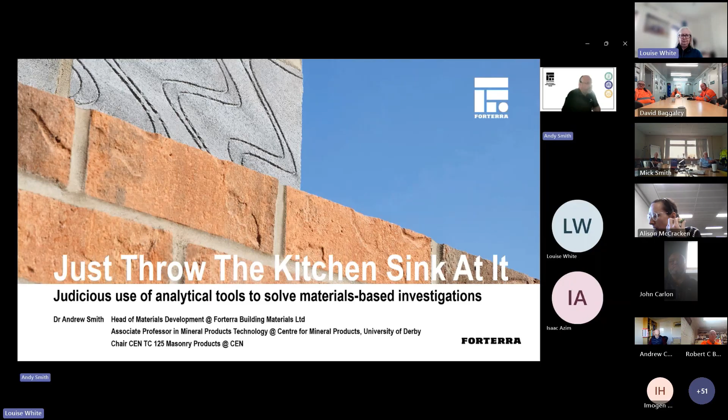Hi, and thank you for joining me for this presentation on Just Throw the Kitchen Sink at It. Most of you all know me. My name is Dr. Andrew Smith, Head of Materials at Forterra Building Materials. Some of you will also be aware that I'm also one of the main deliverers of the programs at the University of Derby on the clay side of matters, and also that I chair the European Standards Technical Committee for masonry products. So, as you can imagine, analytical techniques and how to solve materials-based problems is very close to my heart.

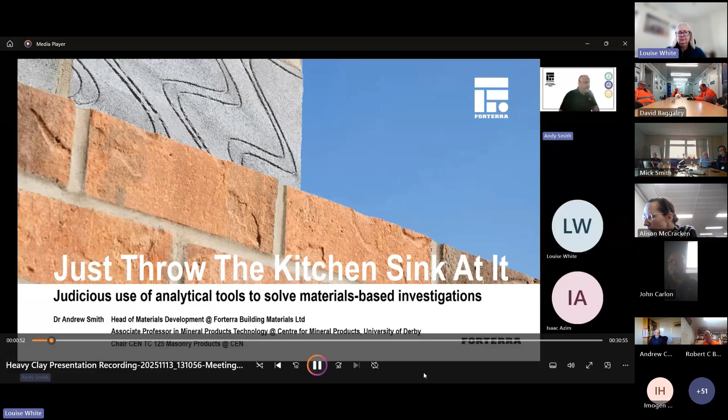So let's start off and try to put things into context. There is great importance in understanding what analytical techniques are available and how we can use them. But the first thing that sprung to my mind was: you can have all the gear but no idea. What I mean there is that you can have all of the equipment at your fingertips, which these days we predominantly do, but if you don't have the idea of how to use them, then you're defeating the object. You may be making mistakes, you may be making some misinterpretations that can lead you down paths that you don't necessarily wish to go.

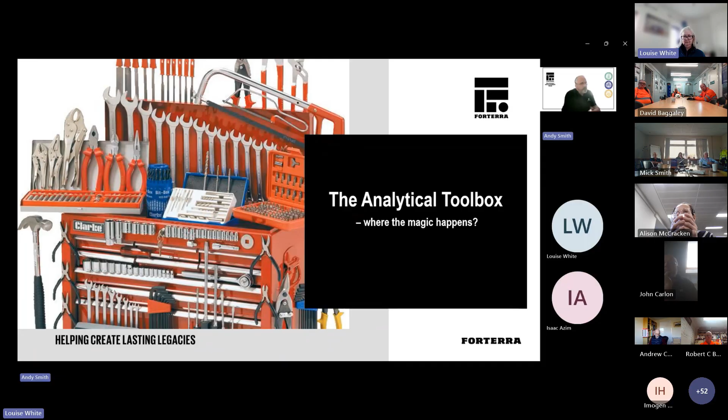So the analytical toolbox - this is where the magic really happens. Well, it really only happens if we use the right tools for the right job. So a lot of this presentation today is really around understanding what you're trying to achieve in the first place. A lot of the hard work is done before you actually go out and use the analytical techniques, by understanding and scoping what I would say is the question. So it's all about the question - what information are you trying to acquire? Or put another way, what are you trying to understand from the questions that you're asking? What is the problem you're trying to solve?

So really, before we throw time, resource, and money into solving a material-based problem, we need to understand the fundamentals of what that problem is and put it into a context that allows us to pick the right tool for the right job. So I can break that down into: what is it, where is it, when is it, how is it, and why?

So the what aspect is very much around the scope - what is the type of information that you're requiring from an analytical investigation? In the context of heavy clay, a lot of the time that relates to the materials we're using - predominantly the materials in the ground that we're winning ourselves, or those materials we're bringing in from external third parties. The where could be, is it a specific material? Is it a particular quarry? Is it a particular seam within a quarry? Or is it more generic? Or is it also specific to a stage in the manufacturing process?

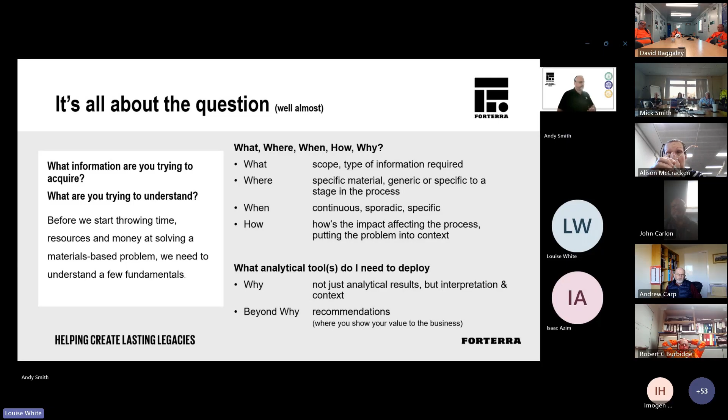Or it could be something more specific and closer to home, in terms of the stockpiles that we've built. We could be taking material out during the preparation stage, the forming stage, the drying stage, or the firing stage of the actual brick making, roof tile making, clay pipe, clay paver type process.

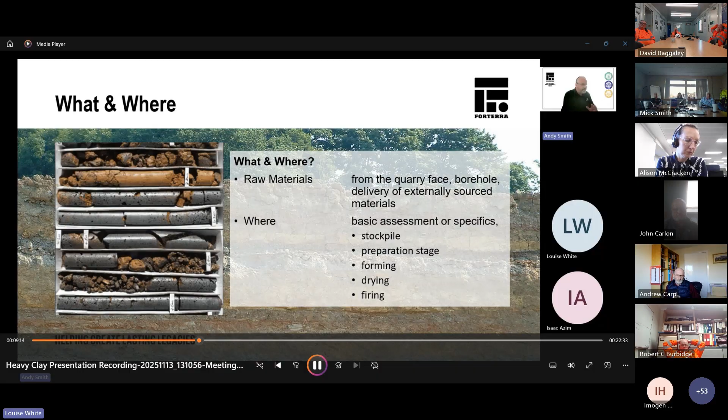So there's an aspect here of, again, depending upon where you are in the process—if you're right at the very front end, before the material has actually ever been won, or you're within the process and something is not quite right and you're being asked to investigate it—then there are different tools that you would apply or deploy in order to give you the answers that you're looking for.

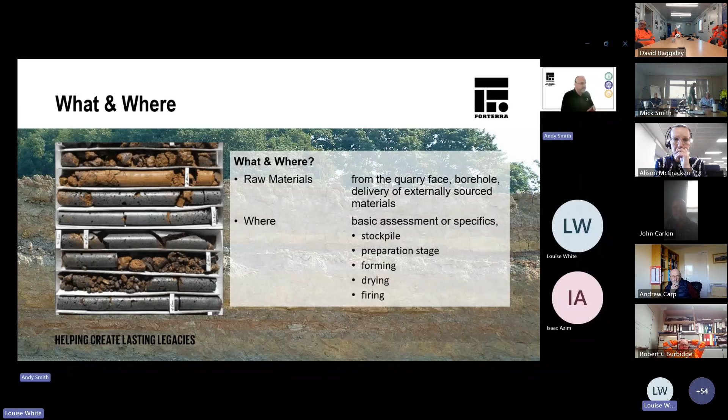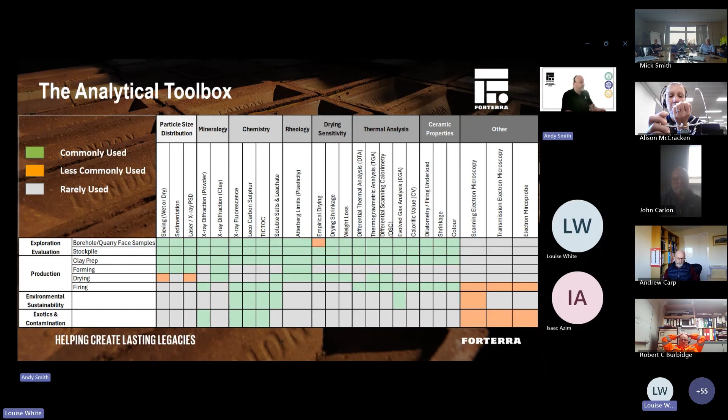So let's have a look at understanding clay-based materials. Because we're talking about heavy clays here, and the heavy clay side of the construction materials sector, all of these are pretty much applicable to any of the heavy clay product types. Obviously I'll be focusing on bricks, but it's applicable to block, roof tile, and pipe manufacturing as well.

So size matters—in the context of particle size distribution, size really does matter, because we think of our deposits as being clay deposits, we talk about them being clay deposits. But as those of you who've done this type of analysis before will know, the clay mineral component can be as little as 10-15% of what the bulk raw material actually is in terms of what we make our clay bricks, roof tiles, and clay blocks out of. So understanding the fundamentals of how much clay is actually in our clay deposit is really important.

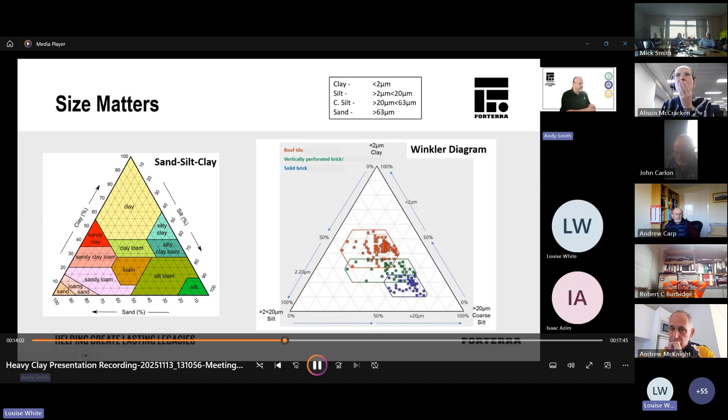Fundamentally, it breaks down to the sedimentary deposits that we're looking at—the raw materials can be broken down into 3 or 4 principal size fractions: the clay fraction, the silt, the coarse silt, and the sand fraction. The bit we're really interested in is the clay fraction and also the silt fraction. The coarse silts and sands are basically the bulking agents that go in there and can change some of the properties of the raw material as it goes through our manufacturing process.

But fundamentally, the first thing we need to understand is how much clay we've got present, because that leads on to other aspects that give us an indication of how the clay is going to perform. So the more clay we have, that will affect the plasticity properties.

That will have an influence on the shaping, the forming process, as well as the drying process. It will also influence the firing process, because the more clay mineral we have, the more ceramic glass we're likely to produce, which bonds the brick together and gives it its physical properties at the end of firing. So by understanding how much clay mineral is present, we can start to answer questions about how the final product will perform.

This can be done in a number of ways, but you can see here what we call ternary plots. In triangular form, each point of the triangle represents sand, silt or clay fractions, or in the case of the Winkler diagram, clay, silt and coarse silt being plotted.

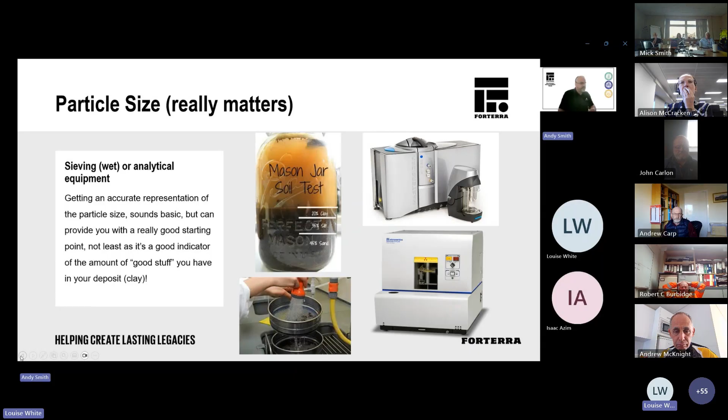Or we can use analytical techniques, such as the Malvern Mastersizer, which is a laser sizing process, or a Sedigraph, which uses a slightly different technique. Essentially we can use the same approach to understand particle size.

We can get data presented in a number of different ways. I've put two graphs here showing exactly the same data, but presented differently - one is a standard grading curve, the other a volume density percentage. Depending on what questions you're asking or what answers you require, you can use either technique to present the data in the way that's best or easiest to interpret.

If we take the data from the upper graph, our standard grading curve, we can take that information and ask: what is our clay fraction? What is our silt fraction? What is our coarse silt fraction? And where does it plot on our clay, silt, sand graph?

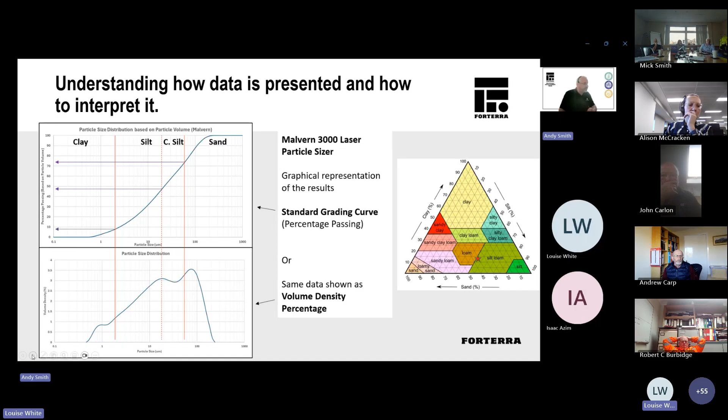The material I was looking at here plots in this silt loam area, which is not untypical of the types of material we generally use for making bricks.

Plasticity - the clay's influence on how the clay body performs - is also important. Clay's superpower number one is its plasticity. We all recognize things like non-sticky material that doesn't stick to your fingers as you play with it, through to being very sticky or very plastic. But occasionally it can go a bit too far, and we don't really want to go there.

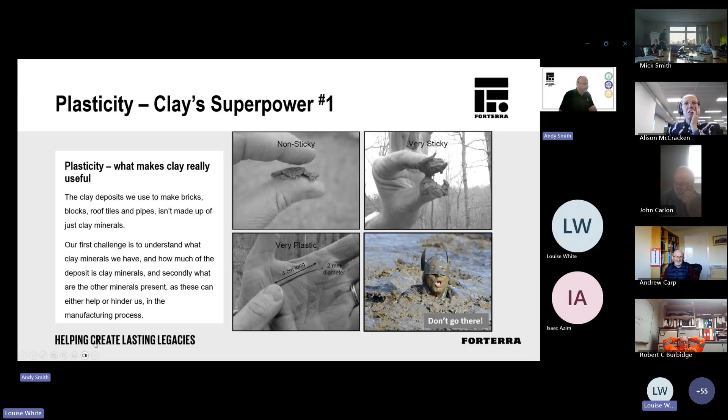So how can we look at this plasticity process? We can use something like the Casagrande method, which you see here on the left. This is a method for determining the liquid limit, so the point at which our clay body performs more like a liquid than a solid.

And then the second aspect of this is we can look at the plastic limit. There's a Casagrande method where we can use the equipment there with the brass shell. It's an old technique developed for assessing soils and geotechnical information, but it's really useful in understanding where the thresholds are for how much moisture you need to make a plastic body - what the upper limit is and what the lower limit is.

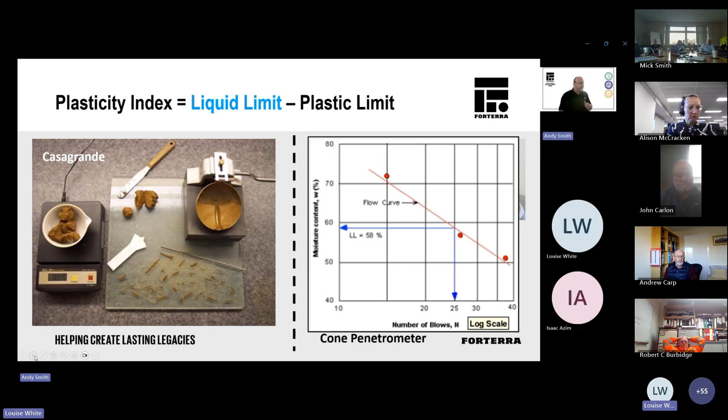The plastic limit at the opposite end is how little moisture you can get away with putting into the body. This is really the area we need to be working towards, that threshold. We need a plastic body so we can mold it and shape it, but we don't want too much water in there that it takes a long time to dry the products during drying. So we need to form the brick shape, the roof tile shape, extrude the clay block, but we don't want it so wet that it takes a long time and a lot of energy to actually get that water out of the body.

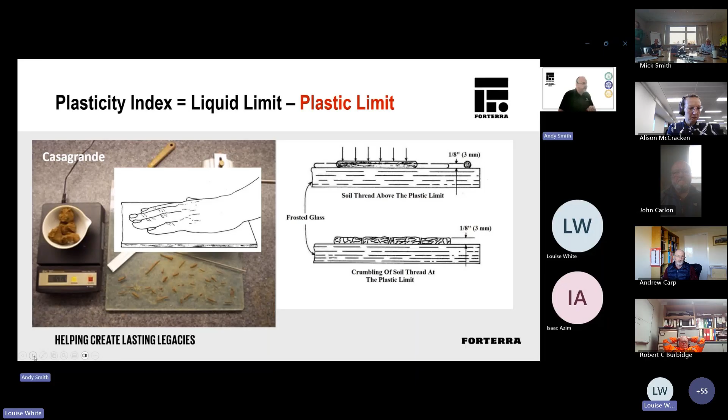So using this plasticity index, we can get some predictive understanding of how our material is going to perform. It's key to understanding the extrusion, the soft mud, the drying shrinkage, and drying sensitivities. For each clay type, we can identify what the optimum is for the particular processes we're trying to use - so if you're using it for soft mud or for extrusion, they will have a different plasticity index value that you're trying to achieve. It's quite a powerful tool for understanding how your clay is going to perform during the manufacturing process itself.

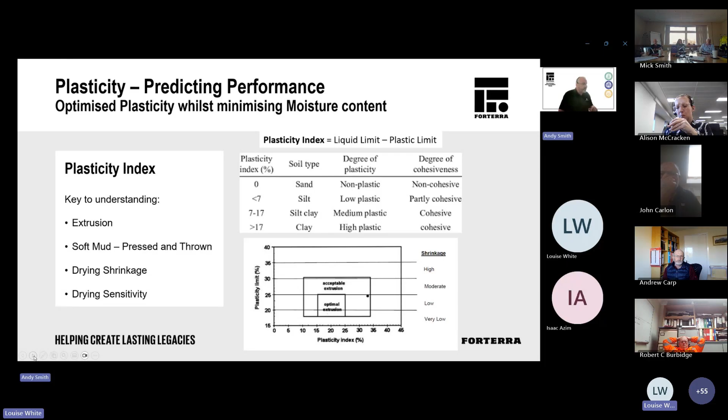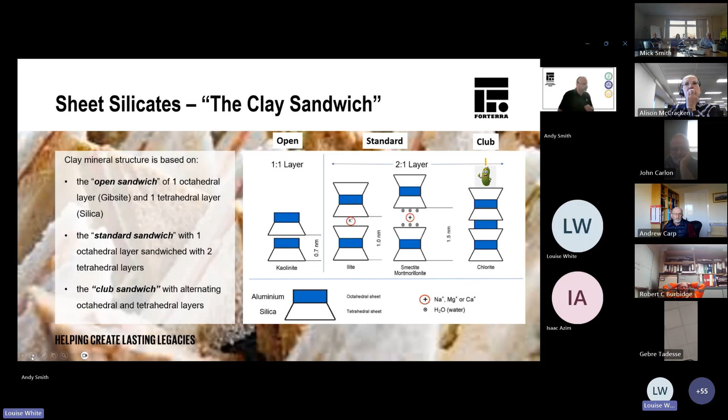One way we can look at the clay mineral specifically is we can extract the clay mineral from our clay body and look at how it reacts. One of the important things is using a technique known as X-ray diffraction, particularly the clay-oriented mount process. Basically, we take the clay off as a slurry, pipette it onto a glass slide, dry that glass slide, and then run it through an X-ray diffraction machine.

This allows us to differentiate - clay minerals have very, very similar structures, so one of the important things is for us to be able to differentiate between them. We can use an air dried sample, and we can treat the sample with ethylene glycol as well, which expands the spacing between layers, working on swelling clays such as the montmorillonites. Or we could heat treat them, such as the kaolinite, where if you heat kaolin above 550 degrees, the structure collapses, so it disappears off the trace.

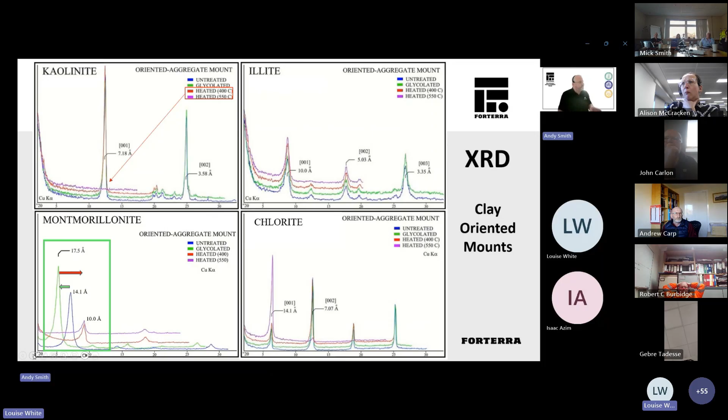On the montmorillonite side, if we use ethylene glycol to soak into the clay, it will expand the swelling layers in between the clay structure, and therefore we can see that with the X-ray diffractometer. Again, if we then heat it, they will collapse back to the illitic structure at 10 angstroms. There are lots of these different techniques, and a lot of interpretation that goes with it, but they're powerful tools to understand and predict how our materials are going to perform.

And this is just one way, one material that we've looked at, basically air dried and glycolated, and we can see that there is a montmorillonite or smectite type of clay mineral present that is going to influence the drying shrinkage, the plasticity values for our material as we use it.

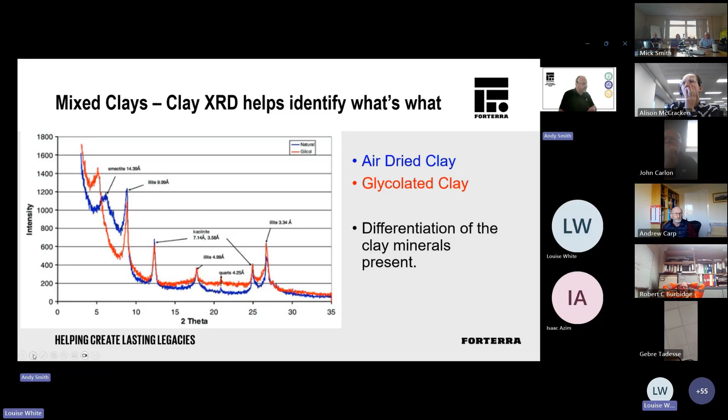The other thing we can use is what happens during the firing process, understanding what happens to our clay body as it goes through firing. Essentially what I refer to this as, and some of you have heard me talk about this before, is the time temperature transformations.

So the ones for us that are really important are what the clay minerals are doing, and what some of the other materials are doing, such as the calcite, the gypsum, the pyrite, because they're the ones that will be giving off gases. The illite, the chlorite, the kaolinite, the montmorillonite, they will be converting into the ceramic glue that sticks our bricks together.

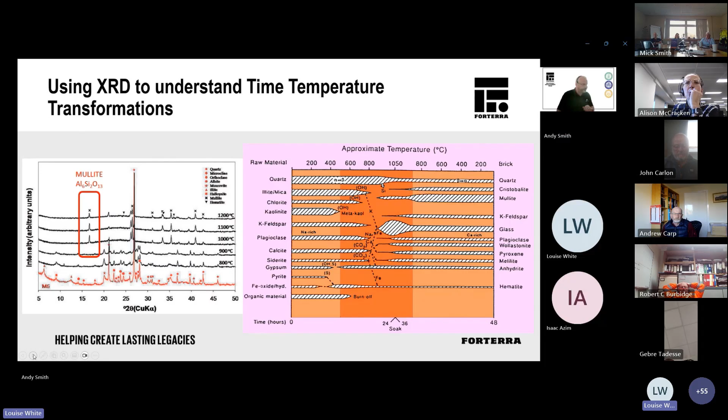Next, obviously a lot of us are very much dependent upon what the color of our product is, so therefore the iron content is important. Looking at the iron content gives us an indication of what color it will fire to.

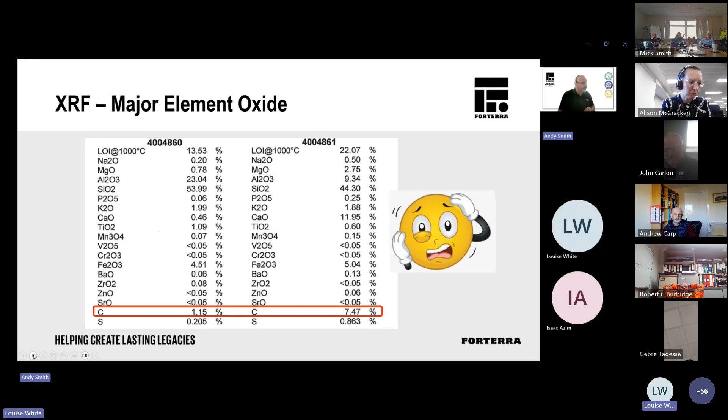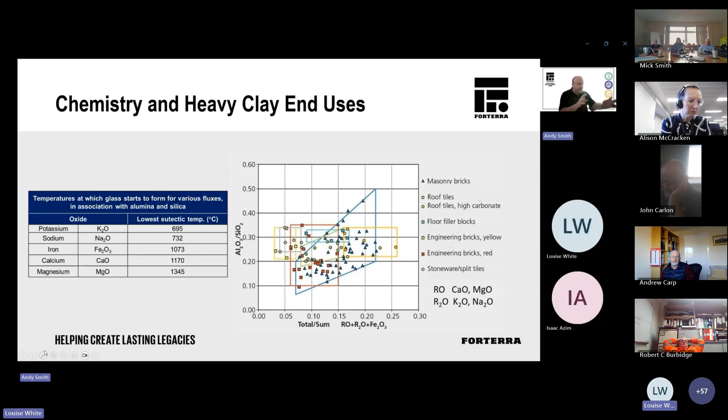We can also use it to look at the fluxes, so therefore what temperature things are likely to happen. If we have high potassium, high sodium levels, things are likely to happen at a lower temperature in terms of glass formation, the ceramic bond in the firing process, than if we've got calcium and magnesium dominant materials. And therefore we can plot those and use that information in a slightly different way to give us an indication of where our materials fit.

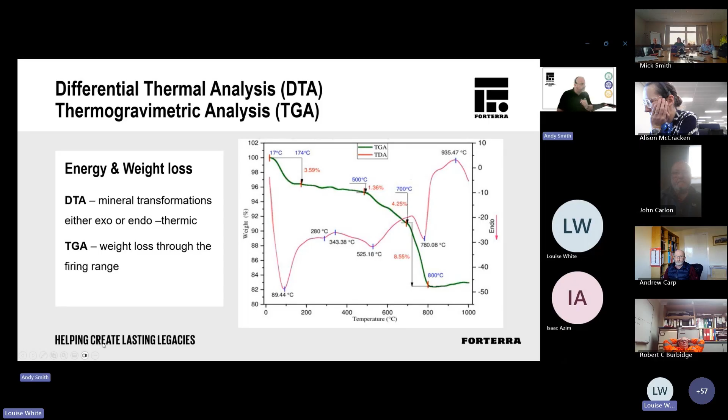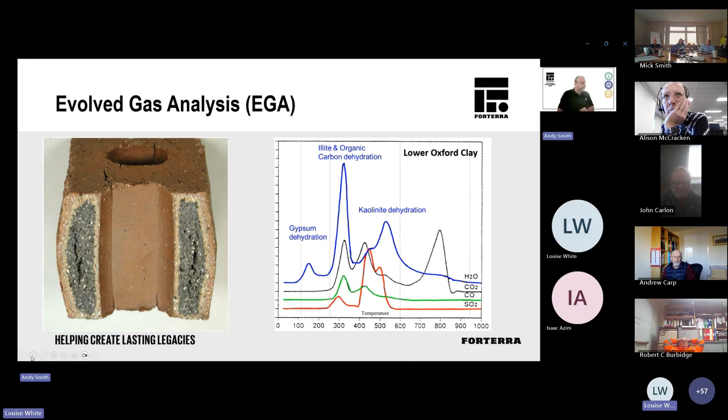So this tool is quite useful in understanding what gases are coming off at what temperatures, and therefore we can build that into our firing curves. So that's been a rapid run through the analytical techniques and approaches you can use - the judicious use of analytical tools is basically select the right tool for the right job.

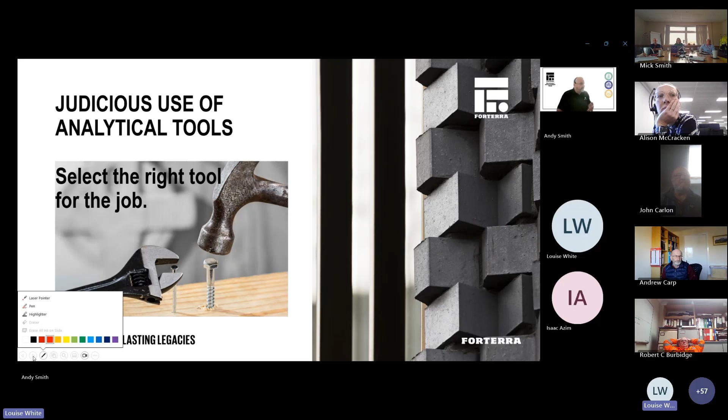So with that, I'd like to thank you. I hope you found that useful. It's been a bit of a skip through the process, but hopefully that will give you a few insights of what can be done and how you can take that information and put it into your manufacturing process. Thank you.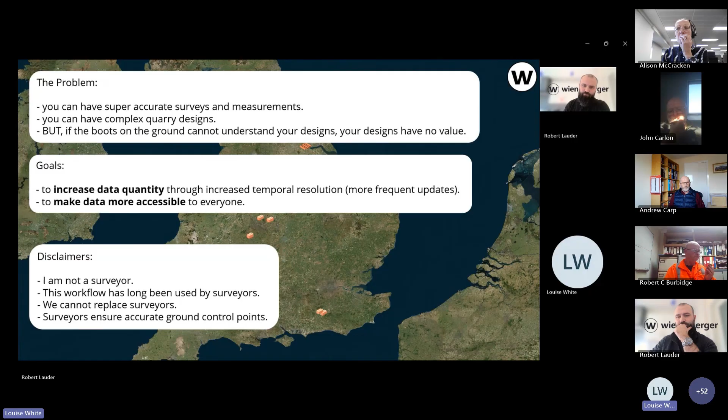So, stockpile building. I'm just going to look at an idealized timeline of a clay win at one of our sites. This is going to be traditionally, so before I started using drones, how it would usually go.

So you'd get your stock survey. This one was around March. At this point, you'll already have a rough timeline of when you're thinking of clay winning, but this will firm up the date for stockpile depletion and firm up that clay win start date.

So once you've got the survey back, you'll draw up initial ideas, discuss options with the site, things like material sources, your blends, any major targets. So if you're putting in any major ramps, establishing tips, big objectives for the clay win.

Later down the line, this will be, say, a month before your clay winning, you get this final stockpile survey just to confirm the volumes that you're going to need. This is when I would do a detailed design.

By this point, we already know what we're going to do. I'll just have a month then to get together all the designs, get them all ready to send over to the site.

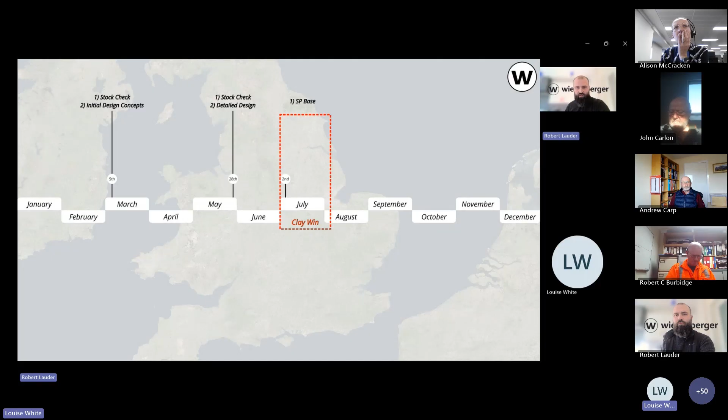This is clay win start. So you'll do your stockpile base prep, then you'll get it surveyed. All you guys know all of this, but just for anyone that doesn't, the design is pegged out by the contractors, surveyors, and the excavation and stockpile construction proceeds as per the design, which I produced at the end of May here.

We would get minimum input other than the contractors, surveyors during the course of the clay win. You'd get a full survey done at the end of the clay win to finalise your volumes, and this will be your only opportunity to check your excavations and stockpiles ourselves.

Usually by this point the contractor would have left site, so if you have problems, it's too late. They're going to have to wait till next year, or you're going to have to get them back in. So this was before I started using drones.

And then these are just your standard, say, stock checks throughout the rest of the year. This window is where our drone use comes in.

So this is where we get extra data throughout the clay win. We can check that we're in line with the design. We can make amendments if need be. We can sort of get a turnaround of, say, I could fly the drone, process it, come back with feedback the next day. So very fast turnaround.

This is also, while the excavations are fresh, we can capture the site's geology through multiple stages. So plenty of opportunities to trace any specific strata through the quarry, and you can get measurements of them as they're moving through. It just builds up a bigger three-dimensional 3D picture of the site.

This window here is where I'm going to be focusing in on. So stockpile extent and layer monitoring. I'm going to show a couple of slides now. They're going to have cross sections through the stockpiles. These cross sections were pulled from LSS, the point cloud into LSS, and then the cross sections.

So start the claywin. This is before there's been any movement by the contractors. I think it's important to capture the site before the stockpile prep, before you've done any base prep, just so that you make sure you're not adding material that's already on stock.

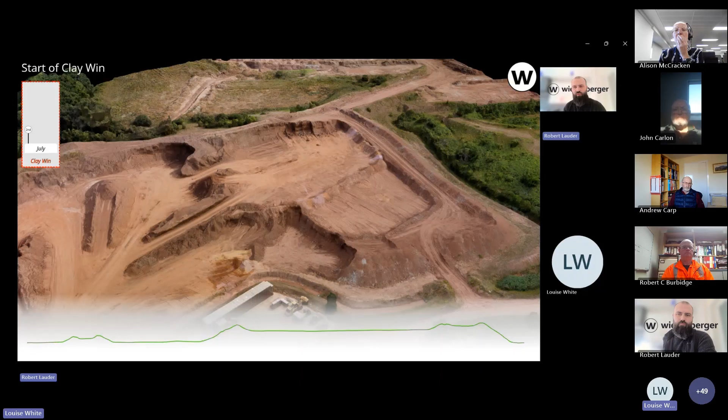In this example, we're going to show that the ramp will be pushed into layer one. It just gives you more control of what volume in the stockpile is what, and like I said, avoids double counting any stock.

So this is the target stockpile, pulled straight from LSS. This is the stockpile we need to build to give us the volumes that the factory needs. You can see on the bottom the cross section. Green is the base, and red is a cross section through the target stockpile.

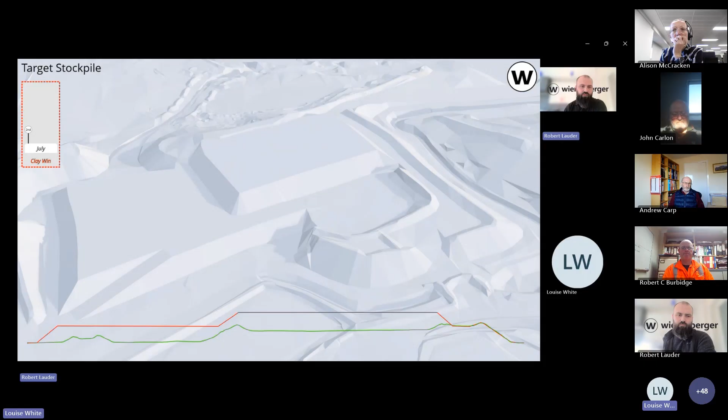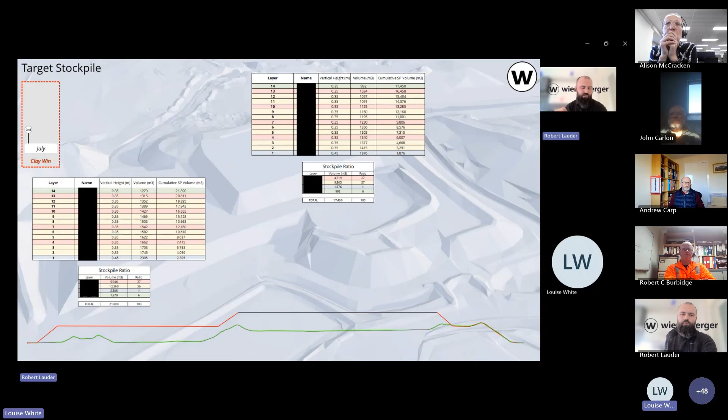Just standard layer plans. I put this to show that when I visit sites, they'll tell me what layer they're on. I'll refer to the layer plan and figure out how high they're meant to be, and we can check if they're building too fast or too slow, and give any feedback on how the layers are coming.

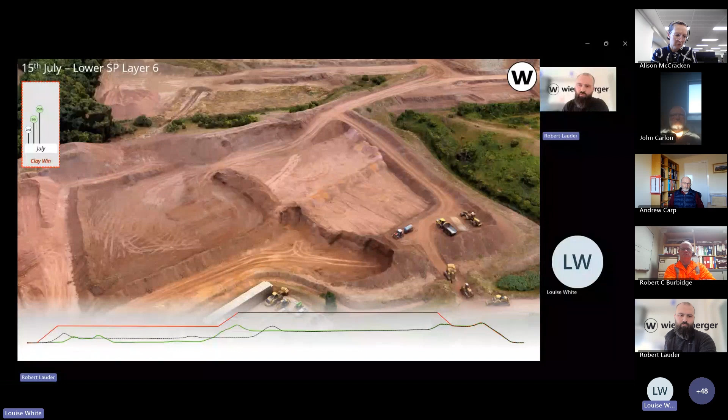Second week in, they were on layer 6 at this time. You can see the stockpile coming up slowly. This was the lower stockpile, layer 6 of 14. And again, it's an opportunity to give feedback to the contractor.

Third week in, layer 12 of 14 of the lower stockpile. You can see we're almost there for the target height.

Okay, so week 4, lower stockpile completed with edge protection. We're now building up the piggyback stockpile. We're on layer 6, building layer 6 there.

And this is a post-clay win survey, so you can see where we are. You can see where we've had to pull the stockpile back down here to allow access, and put your stockpile back there to give us that extra volume. So the volume that was in the designed stockpile that we needed was 39,000. We've got just under 42,000.

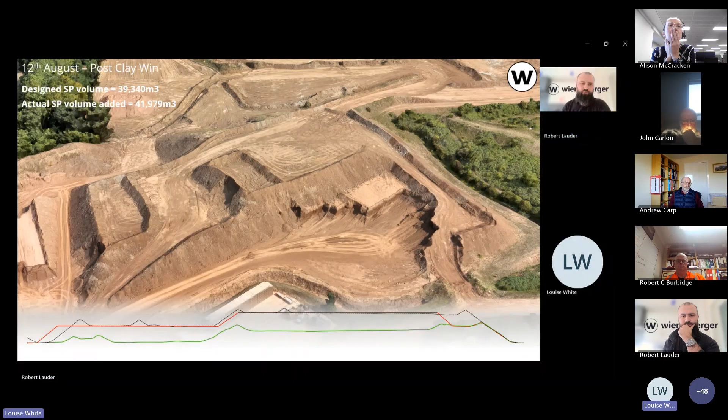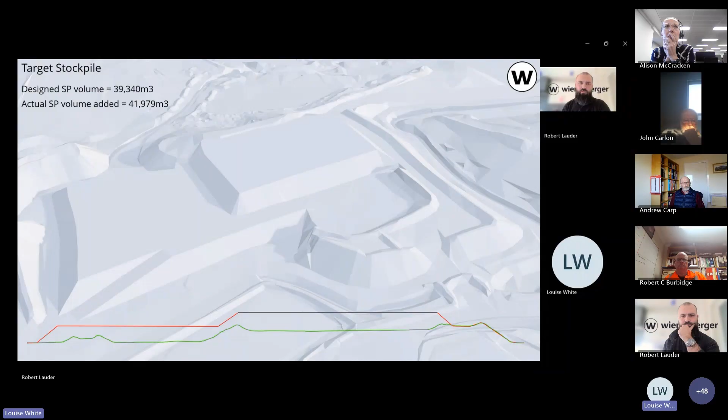Again, that's the target stockpile. I'll just flick back and forth so you can see. It's just a short video, an animation, just to show the changes over time. This is using the 3D meshes that we get from processing the drone imagery.

So quick before and after there. And this was in October, so you can just continue to get updates at whatever frequency you want.

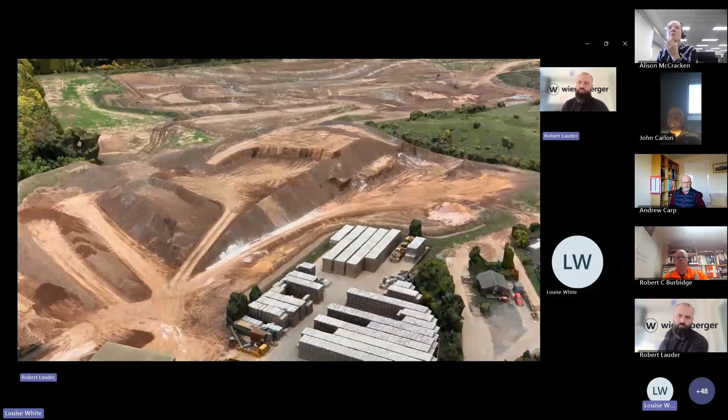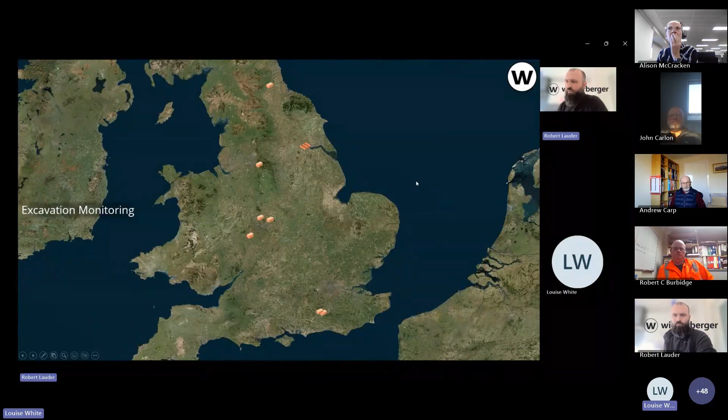And it's going to be about the same for excavation monitoring, same principle. It's going to show you an example of a ramp that we put in. So this is a new quarry ramp, which is going to be in for the remainder of the life of the quarry, so it's quite important to get right.

So this is quite a way into the clay win when there's not much change, because the digging was happening in another area of the quarry. They came to this towards the end. You can see this is third week, back to second week, third week, 4th week. See that ramp coming down.

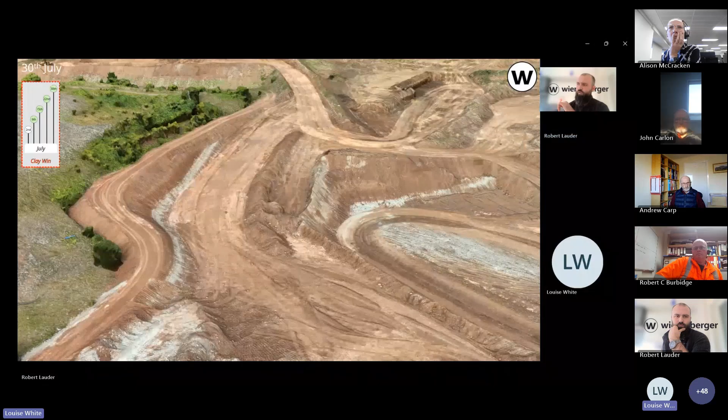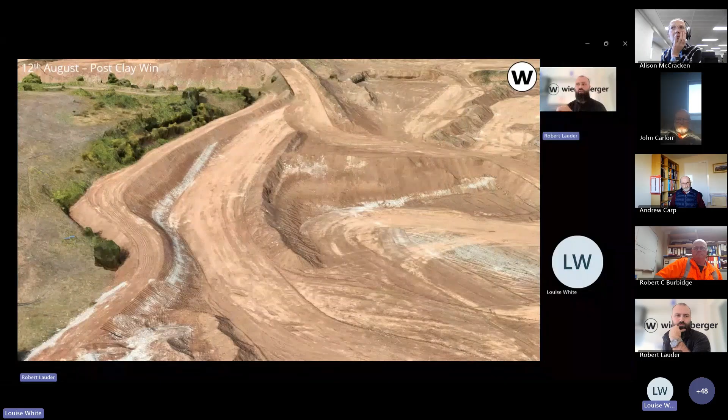This is the final post-clay win survey. Just do some comparisons with the design. So that's the actual survey. Here is the LSS design. And you can monitor that all the way through, just like we did with the stockpiles.

So, presenting data - this is another one for just data accessibility, anyone being able to view the data.

There's plenty of mobile mapping apps where you can export the imagery and export your designs, say your CAD designs or GIS, however you export them. You can load them straight to a mobile mapping app and send that to the quarry managers, and they can walk along it just like they're walking on Google Maps. Anything you want to draw on CAD or GIS, you can export so they can walk over any feature that you draw.

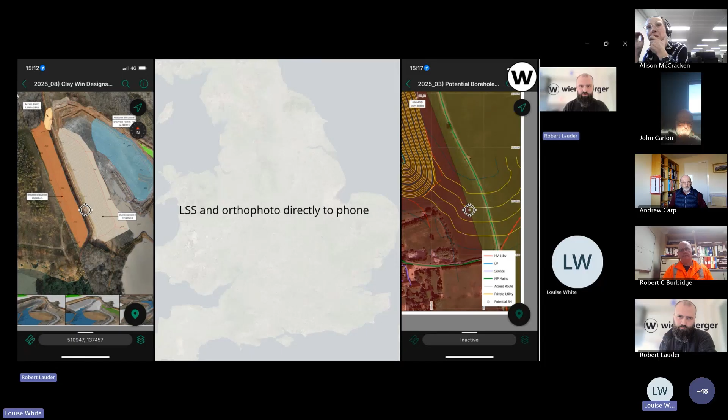This is the platform that we use for viewing the 3D models, and this is just to show that you don't need any software for this - I can share this as just a web link. You can see above and below. These are some of the comparisons - you pull this slider left to right, and you can do exactly what I showed you beforehand, but you can do that on a mobile phone. You can send this to anyone.

Some more examples of the ramp. Again, the ramp from another angle.

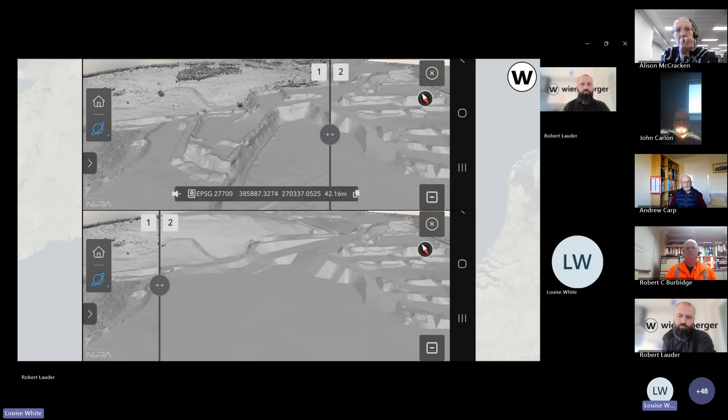So this is the final section here - it's about keeping a record of our sites. As you know, because the faces in clay quarries weather so quickly and grow vegetation pretty quick relative to hard rock, and a lot of them are landfilled, it's quite a small window for us to document the geology in these clay quarries.

When you're getting your surveys by drone, they'll capture the whole site. They'll capture features which you are or are not aware of. So if you find a feature in the future, you come back at your surveys, you can look at it and analyze the change over time.

So, for example, if you've got areas of instability, they'll often show well before failure. So you can look back through your imagery and see slow movement over time, which you may not have noticed just going out and seeing the quarry with your own eyes. You can see these longer term trends by using this imagery.

So here's some examples of this, showing the importance of capturing the faces when they're freshly excavated. Here's an image from 2016 of a fault, and in the 2025 models they're not visible - you can see it's vegetated up, especially quick there, probably because of the fault itself and the water flow.

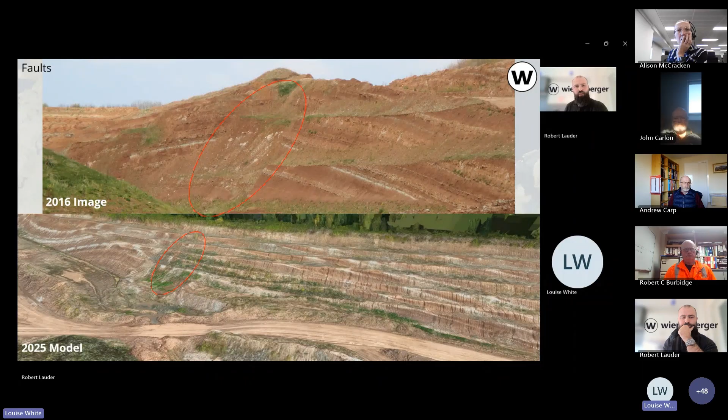There's another example - a 2016 image of a fault. You can see gypsum contaminated mudstone to the right. This has been captured in the model here, but not to amazing quality. But it just goes to show that it will capture things even if you don't know they're there at the time.

A perfect example of capturing the geology and the quarry development is this Halesowen Etruria Formation unconformity. This has been well documented at one of our sites.

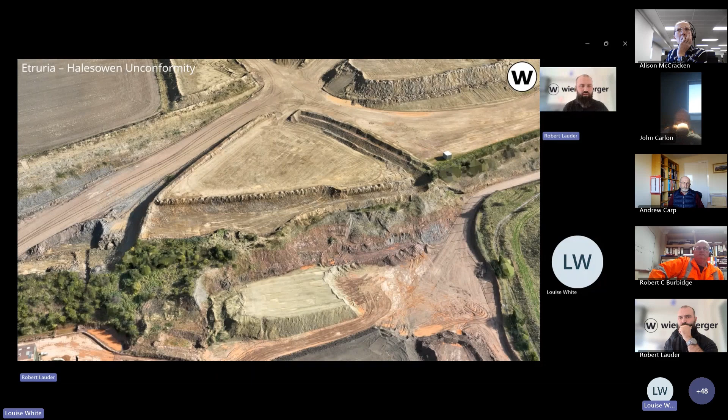You see this here - this is our Stocken Area extension. So I'll just flick back and forth - see, there's the unconformity. There's an 8 meter vertical difference between this contact high here and this eroded channel feature down at the bottom there.

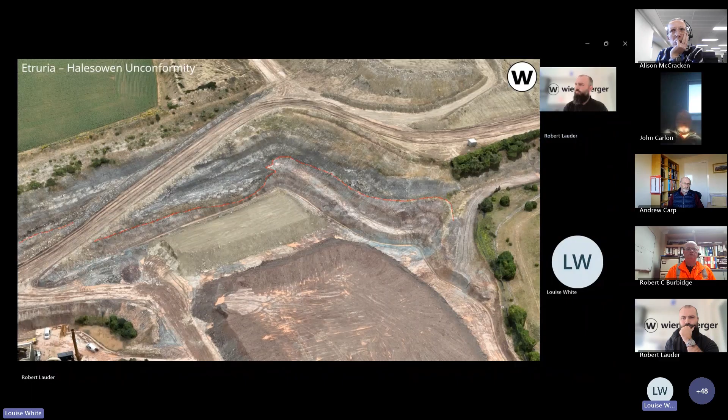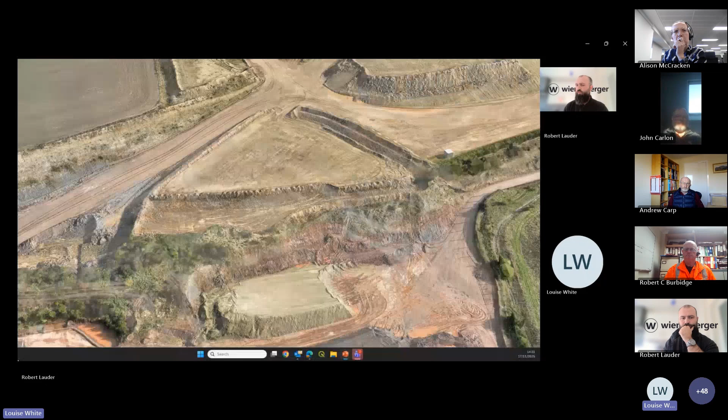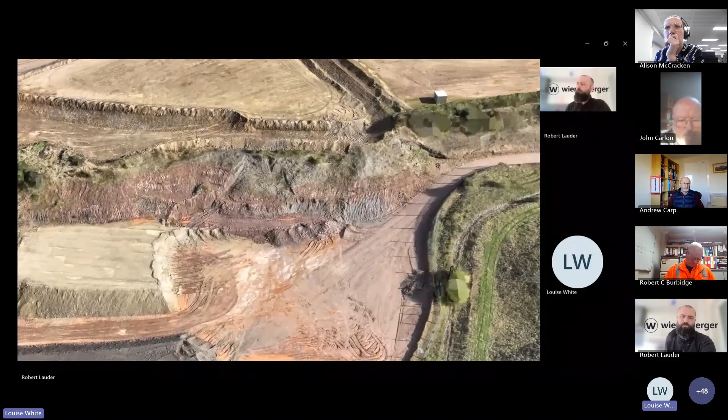And this is just another video showing this contact, this unconformity. You can see if you follow this white line here, that's a marker for it, and follow it all along.

So in summary, in my opinion, the data that we get from drones is underutilized - from the ortho photos, the 3D meshes, which all the animations I've shown you today are produced from, and the point clouds, which are put into LSS. All the data we have should be more accessible. We should be working to make it more accessible within our teams - anyone should be able to view the surveys and the data we have. People with specific softwares and tools shouldn't have a monopoly on viewing the quarry data. We can and should use this as a correct permanent record of the geology.